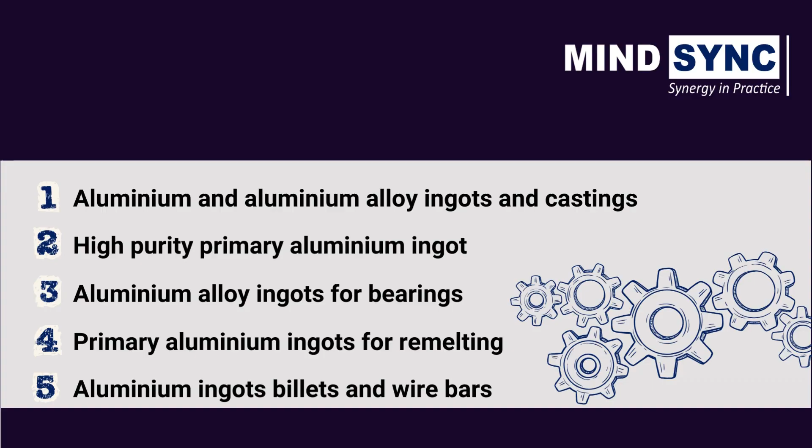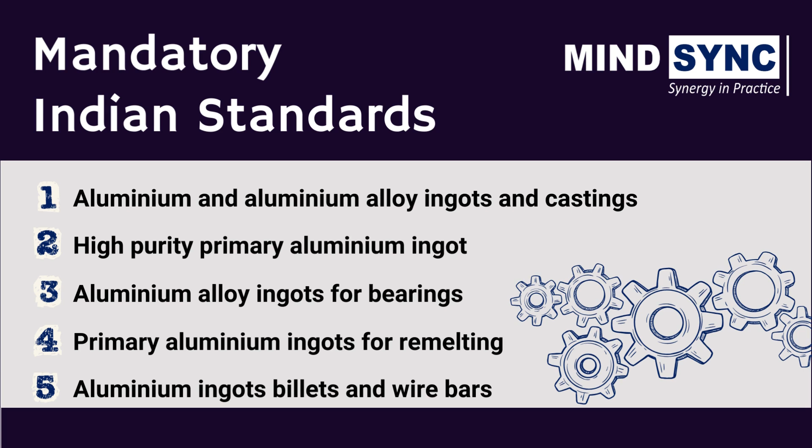Welcome everyone to today's presentation on mandatory Indian standards for aluminium, aluminium alloy, ingots, bearings, and castings. In this video, we'll explore the key standards that ensure the quality and reliability of these essential materials.

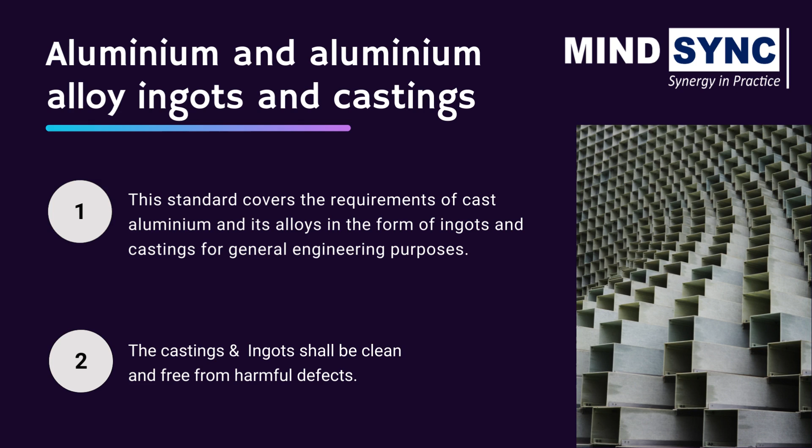Let's begin by discussing aluminium and aluminium alloy ingots and castings. This standard covers the requirements of cast aluminium and its alloys in the form of ingots and castings, designed for general engineering purposes. It's crucial that these castings and ingots are not only of high quality but also free from any harmful defects. Now let's take a look at the requirements for marking these materials.

Marking is a vital aspect of ensuring traceability and compliance. Ingots and castings should be suitably marked with lot or heat treatment batch number, alloy and temper designations, and indication of the source of manufacture. Ensuring proper marking helps maintain quality standards and facilitates tracking throughout the production process.

Moving on to the next standard, we have the high purity primary aluminium ingots. This standard encompasses the requirements for very high purity primary aluminium ingots, intended for remelting in special applications. It's crucial to note that, according to these standards, no scrap material is permitted in the production, except for any scrap that has accumulated during the manufacturing process and has not been remelted by anyone other than the manufacturer.

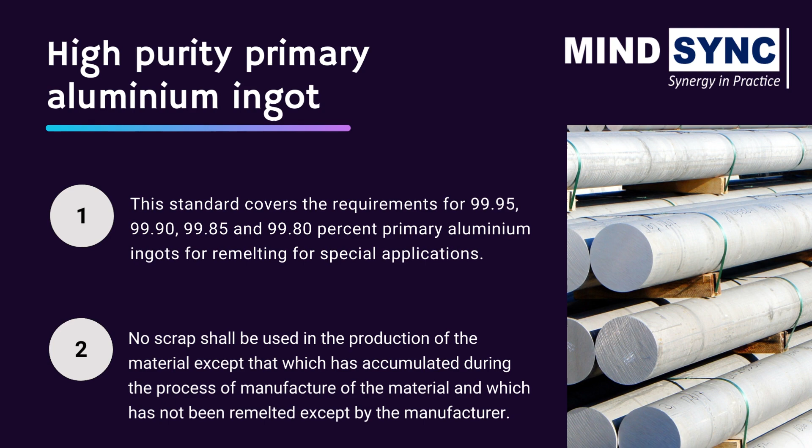Now let's look into the marking requirements. All ingots must be identified with such marking that ensures full material identification. This marking is essential to guarantee the quality and authenticity of the ingots. Furthermore, the ingots may also bear the standard mark, signifying their adherence to the prescribed standards.

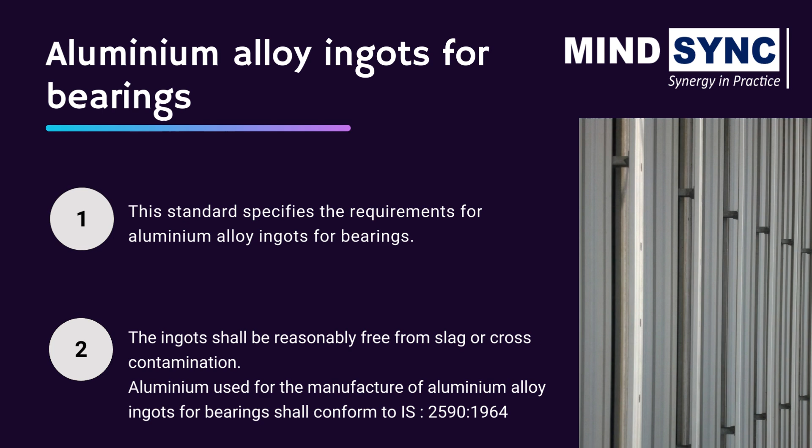Our next focus is on aluminium alloy ingots for bearings. This standard specifies the requirements for aluminium alloy ingots designed specifically for bearings. It's crucial that these ingots are reasonably free from slag or cross-contamination. Additionally, the aluminium used for manufacturing these alloy ingots must conform to the concerned Indian standard.

Now let's look into the marking requirements. All ingots must bear marking that ensures full material identification. Alternatively, ingots can be wired in bundles, with the necessary marks stamped on a metal tag securely attached to each bundle. Furthermore, the supplier is required to furnish a certificate confirming that the supplied material complies with the requirements outlined in this specification.

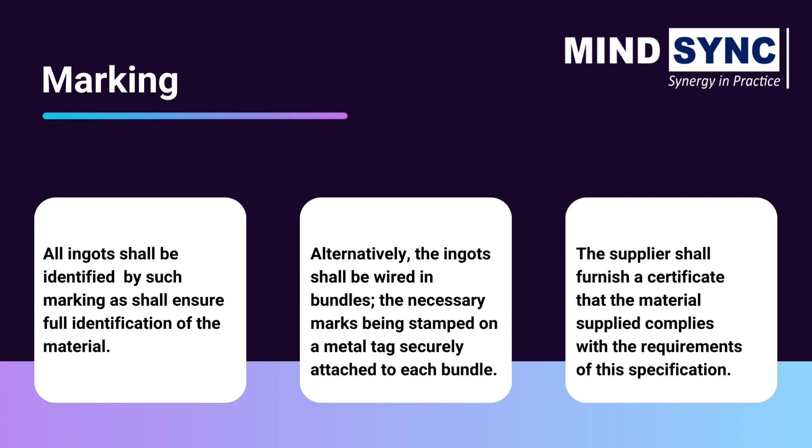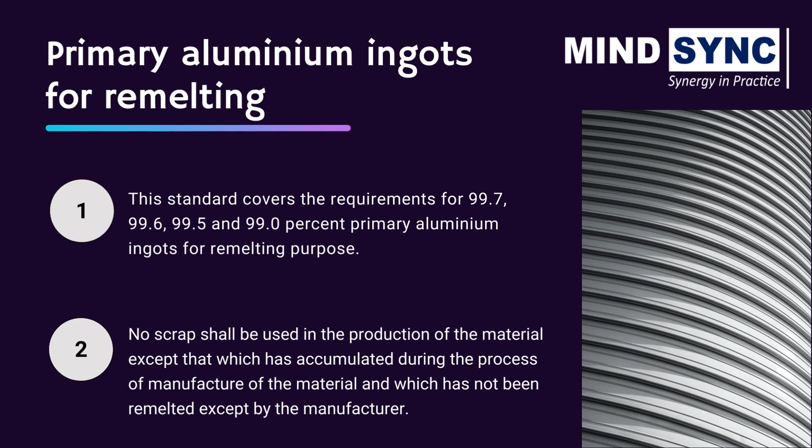Let's now turn our attention to primary aluminium ingots for remelting. This standard encompasses the requirements for primary aluminium ingots specifically intended for remelting purposes. These ingots are available in various purity levels, including 99.7%, 99.6%, 99.5%, and 99%. Importantly, the standard stipulates that no scrap materials shall be used in the production of these ingots, except for scrap that accumulates during the manufacturing process and has not been remelted by anyone other than the manufacturer.

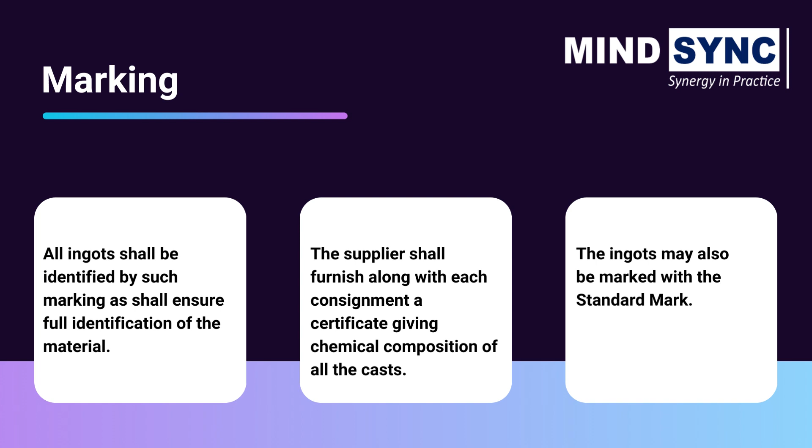Now let's look into the marking requirements. Each ingot must bear marking that ensures complete material identification. Additionally, with each consignment, the supplier is required to provide a certificate detailing the chemical composition of all the casts. These measures help maintain the quality and authenticity of the material. Furthermore, the ingots may also bear the standard mark, signifying their compliance with the prescribed standards.

Let's now look into marking. Each product must be marked to indicate the source of manufacture. Additionally, the marking should include the grade designation, cast or lot or heat treatment batch number, and size details. It's also important to include information regarding the quantity and date of manufacture.